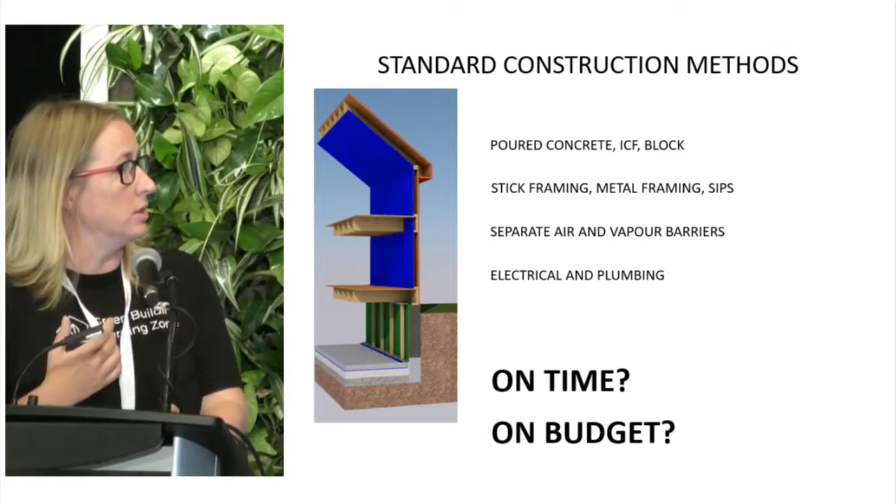The magic words of custom construction, we know it: on time and on budget. I've never actually been able to get those words out and feel like I can meet those criteria, because we have issues like our standard construction methodologies where we have so many different sub-trades coming together. We need air barriers at certain times, and then we have electricians that poke holes in the air barriers. This just shows one of our standard stick-built construction examples, trying to get the air barrier in the basement and the insulation in the right places, and the vapor barriers, and all these other things. We keep having to do these things, and we're coordinating the whole time to make sure that this is on time and on budget.

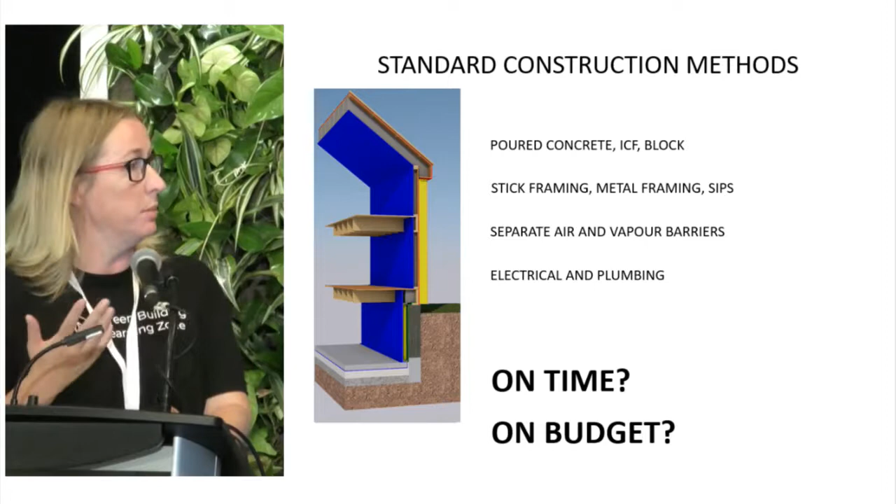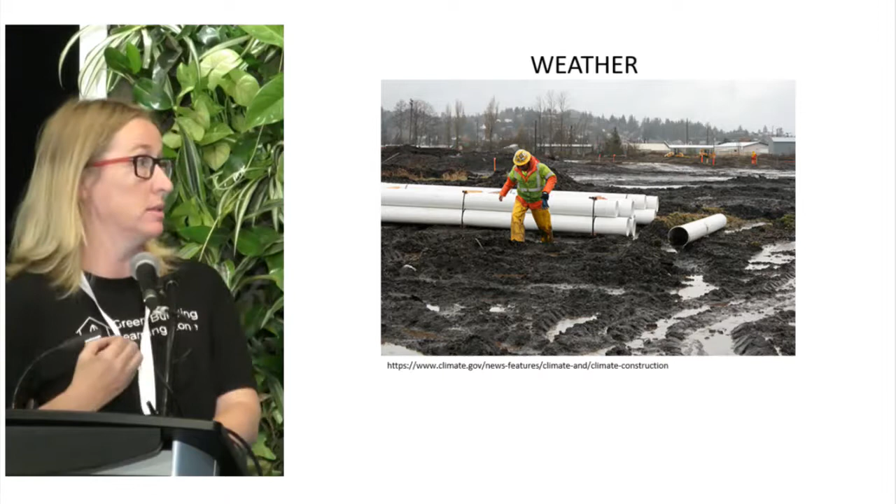But things get in our way. We have weather. And when we're on site working, these kind of conditions are not conducive to the types of detail-oriented work we must do for higher efficiency buildings. People are not at their best when it's raining or it's too hot or they're overcrowded getting things done. So that's not going to be on time or on budget.

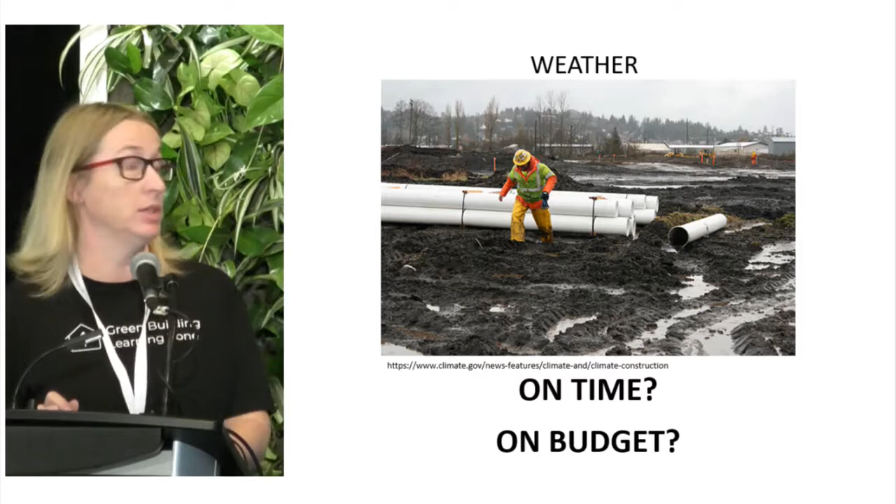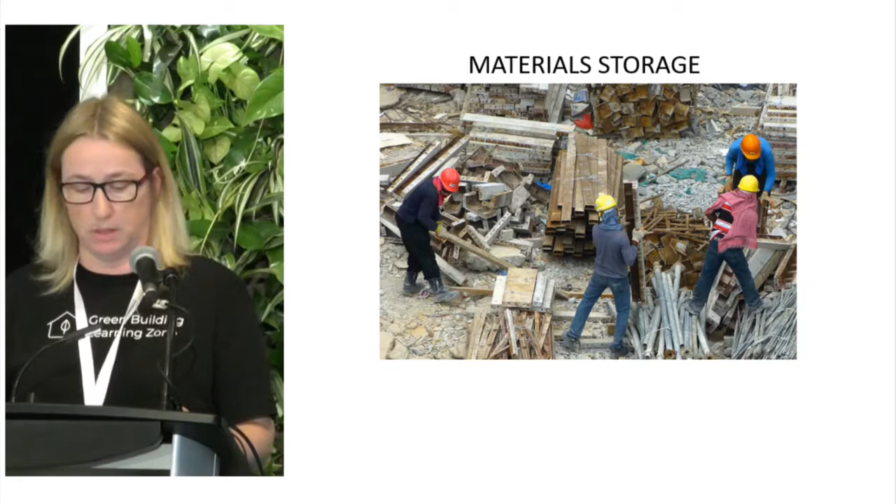Material storage on any site becomes quite a huge issue in some cases, because you're trying to manage this timeline that we're doing things in. When does the air barrier go in? When does the vapor barrier go in? Where are we putting the insulation? Sites are tight, and we're having a hard time dealing with it. So things aren't going to be on time or on budget.

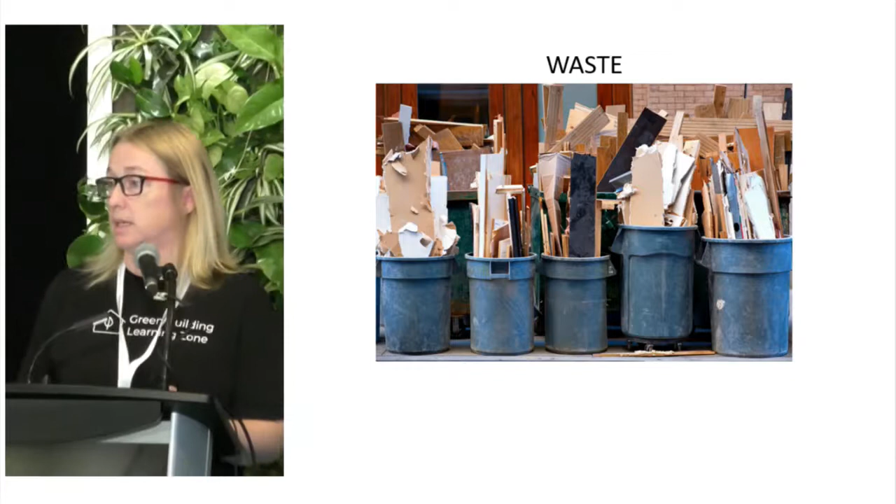Waste. Having that as part of the construction company's mandate is great. It takes a lot of time and energy dealing with recycling, and we have a lot of it. So we're not going to be on time or on budget if we can't deal with the waste stream on the sites.

In our more complex world, people want smart buildings with all this gadgetry, and everybody on a passive house site has to be on board with having an airtight, energy efficient building. I'm picking on the plumbers and electricians because they're putting holes in my building on a regular basis.

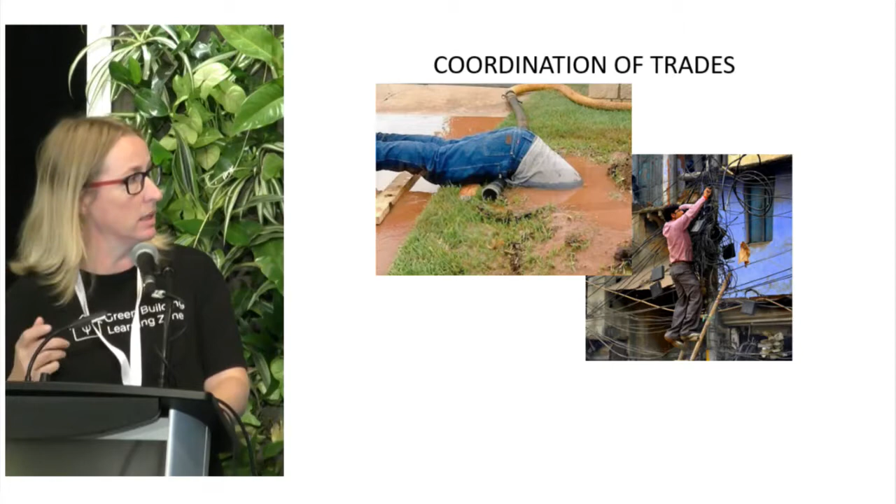One of the things we do on passive house sites is have somebody in charge—the air sealing person—to make sure this is constantly happening, making sure these holes are being plugged and filled in. But it's difficult to do in a site condition.

One thing we did was build a 1-story structure attached to a 2-story rammed earth structure, and there was a bit of a thermal bridge between the two. So we decided to use aerated concrete block and ram it right into the rammed earth wall. It would be hidden because we had a drop ceiling on this studio that was now 2 feet wider, and we'd put the mechanicals in there—you wouldn't see the aerated concrete block.

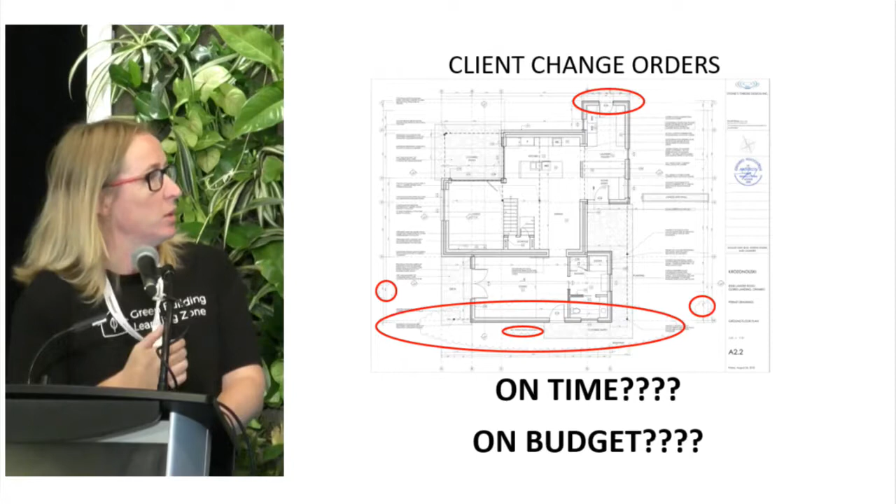And I thought I had it all covered. I always tell my clients it's like picking lice out of hair after finishing a set of working drawings—you have to go back and make sure you get everything. So we did, got the extra permit, and everything went well. Then the client said, oh, I like the cathedral ceiling. So now we have aerated concrete block as a feature on one of our walls.

So you can never know. These things are hard on all of us. When we're doing integrated design, we want to make sure we've got everything covered and we're all going in one direction forward.

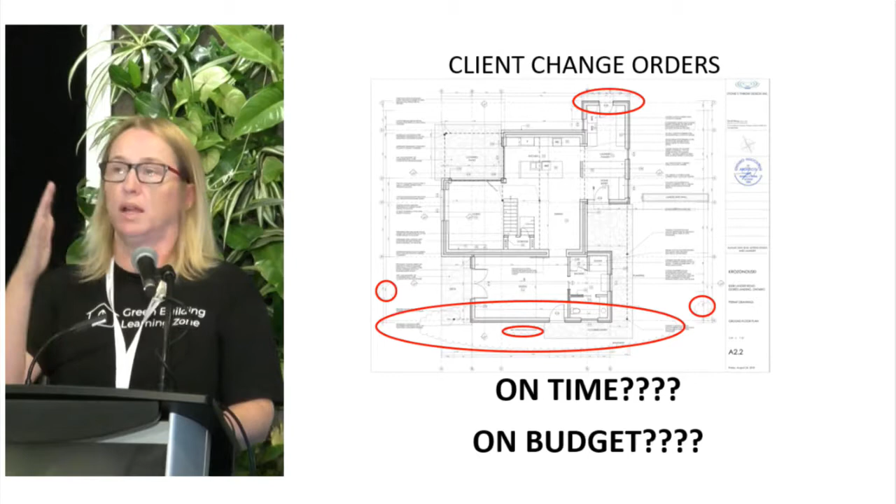So next level construction methods, I think, is kind of how we're going to have to go forward. Because if we're stepping over each other and leaving stuff on the site, what can we do to make this a little bit easier? Pre-designed structures is one way of thinking about it, and prefabricated panelized structure is another. You still have weather, but a lot less.

In a prefabricated or panelized building, we're working in small factories. I work mostly in small scale buildings, so a factory is just a roof, it's dry. We still have the same carpenters in the same spaces doing the same jobs, but they're never building in the conditions of a rainstorm.

You're not building when it's 30 degrees outside. With the weather the way it is, this is the place where we can take that out of the equation. Material storage becomes easier because now we're dealing with a building where we know what the inputs are and what the outputs are. Coordination of trades becomes a little easier too.

Mostly when building panelized—at least the ones I've dealt with—the electrical and mechanicals aren't part of it. I see potential for the future where we're looking at panelization that includes a click-and-play of that sort of thing.

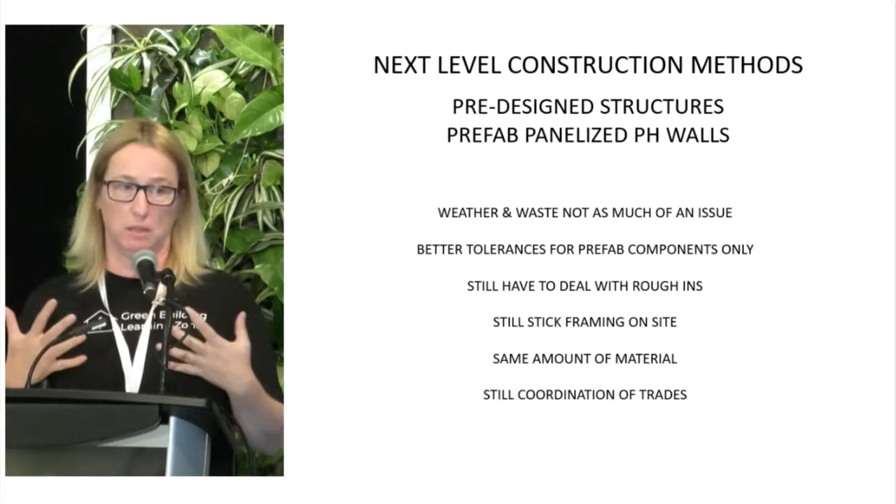You can optimize to a certain amount, and if you're a large enough company building in a panelized way, you have less waste, but you're looking at maybe a 10-15% reduction in costs for these types of buildings. With panelized structures, my suggestion is that the penalty for client change orders should be huge and reduced to a minimum, because once you've started building wall panels and roof panels, it costs a lot for clients to change their mind.

So perhaps it'll be easier on me in the future in that regard. I'm going to go through a few companies I've worked with or know of that have done some interesting things, and they're all a little different.

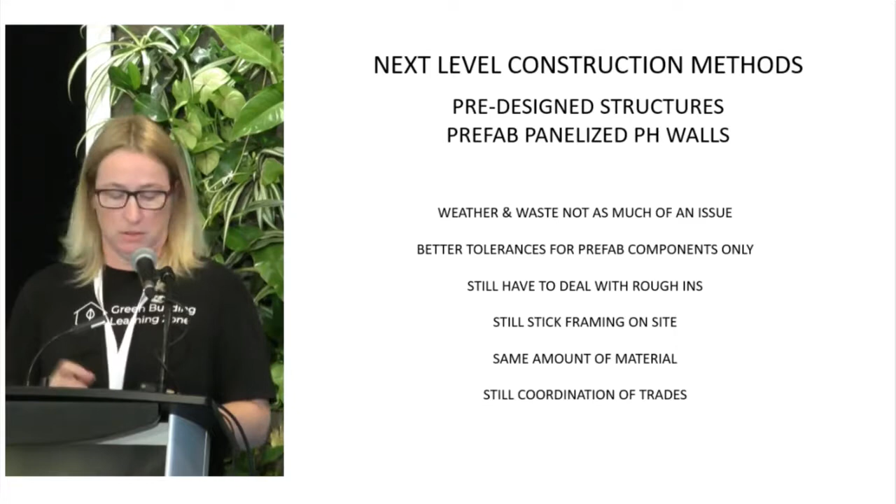This is Aiken Frame Homes, and they use attic trusses, helical piles, and a different construction season to reduce cost and provide affordable housing. They're an international company, but they started out in Muskoka.

What they do is build the top half of the house first, and then you live in it for a little while, and as your life circumstances change and you need more space, they pick the house up.

This is a project at a school, and it's actually going to be a dormitory underneath. But for the most part, these are single-family homes where they lift the house up, and they can build in the wintertime when the construction industry is usually less active in the areas where she's working, to benefit from those cost savings.

But there's another level we can go to with panelized projects, where they not only make the walls but can add the windows and some of the finishes. So I see that as a future for panelization.

But panelization is still a little bit custom if you think about it. This is showing some air barriers in the spring, and they'll keep adding to it. Every time you go to work as a carpenter, each wall is going to be different. There's no widget where you're making 30 of these today and 40 tomorrow. So although panelization is great for quality, if you're building something different every day, there are learning curves, there's time, and there's an expectation of getting up to speed on the next project.

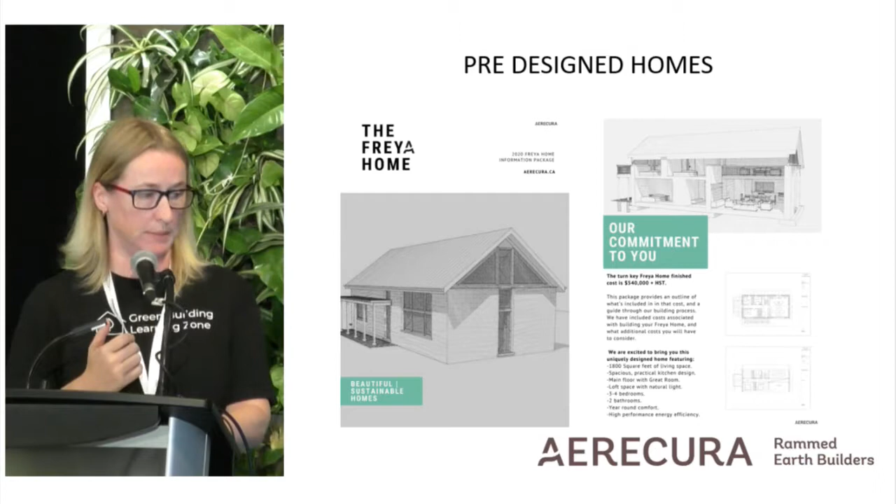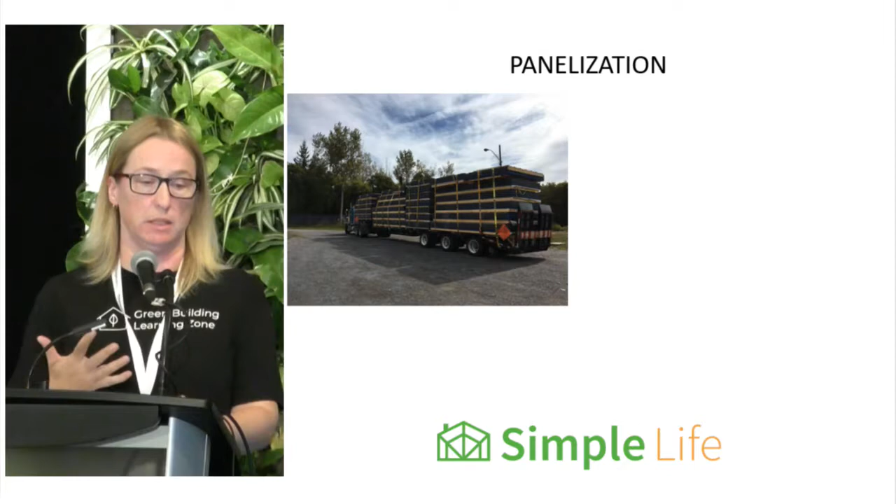They design them in 3D so they can see where it's going in the building and how it relates to the interior walls and windows and how it all fits. I always think of house construction on site as being within 6 inches or within 3 inches, but this is closer to industrial design, where you're thinking about millimeters instead of being out of square.

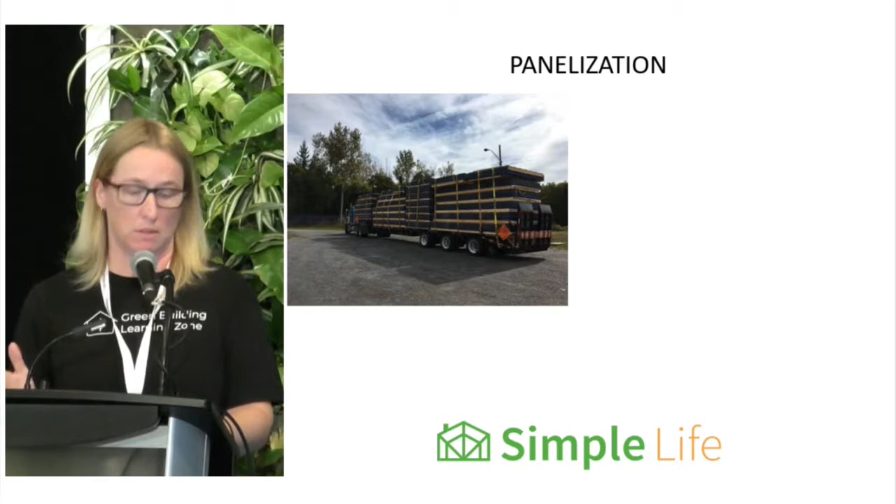And so they bring them to the site and they're part of the installation process. So it's a new way of thinking of what carpentry is and how carpenters work on site.

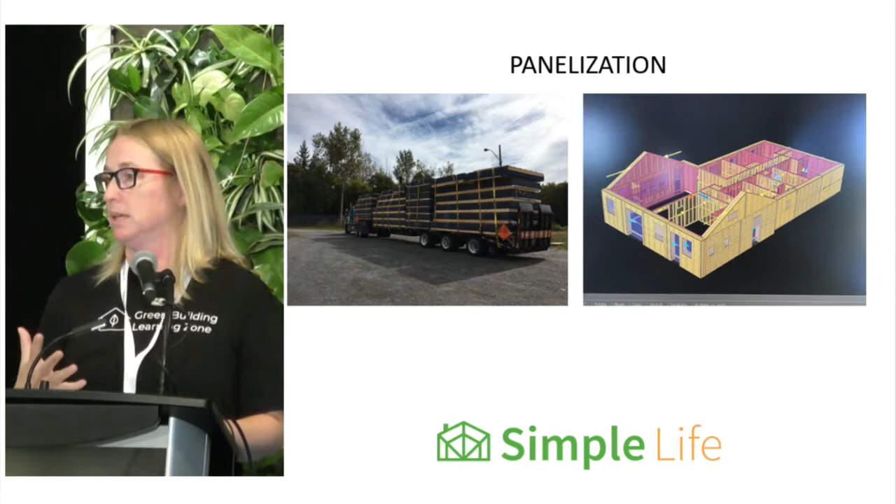So here's a factory of pinwheel structures. They're in St. Catharines. As I said, it's a place where you can start building buildings on - there's the factory for pinwheel structures.

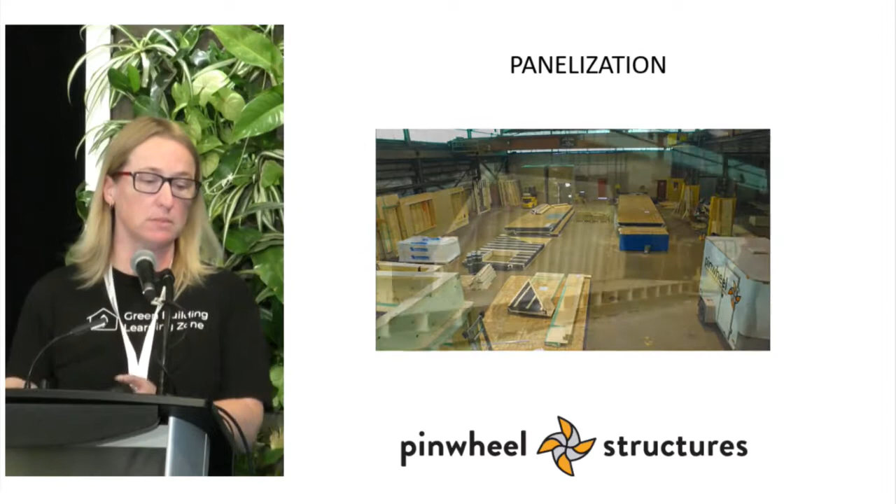And they do the same thing that the Simple Life home does. They're creating structures, adding a little bit more sometimes now with finishes on the outside of the building. So you can see the same wall going up, and they've got the equipment to lift these larger pieces and bring them to the site.

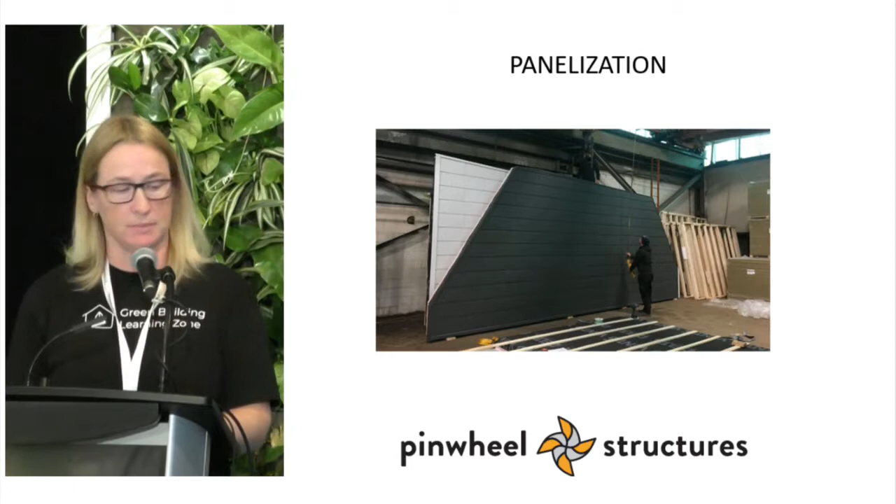So I think that this idea is a great idea, and I think you need to take it to each of these companies as they're starting out. They're very excited about what they're doing, and they're all going to be going to this next level.

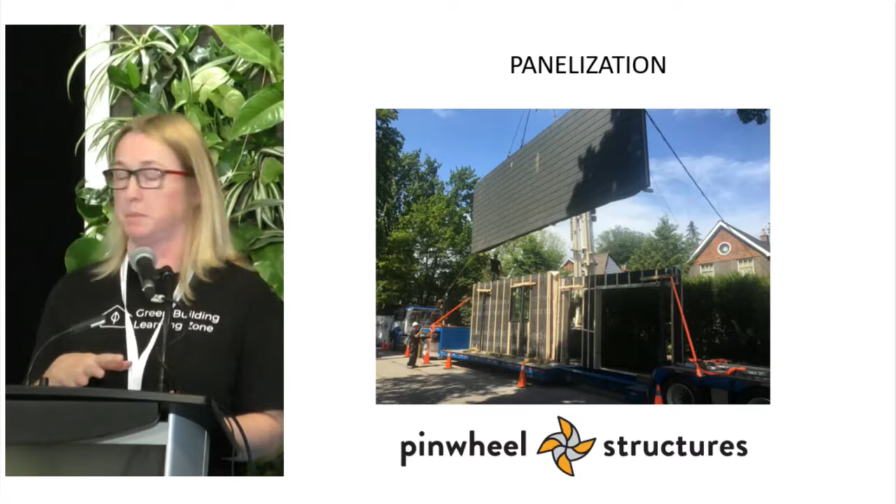So Build Smart, which Adam Cohen, who was going to do the speech, started many years ago, decided that we should have widgets - that panelization should be limited to a small lexicon of parts, an IKEA version of the envelope components.

So you can pick and choose from the foundation to the roof how you're going to build your Build Smart home. And it includes everything that you see there, including the passive house grade windows.

By limiting those numbers, picking through it, an architect or a homeowner can pull together different designs. So the homes are still custom, the buildings are still custom, and it doesn't matter if it's a one-story structure or a multi-unit residential building. The parts are all the same so that you can create these different structures.

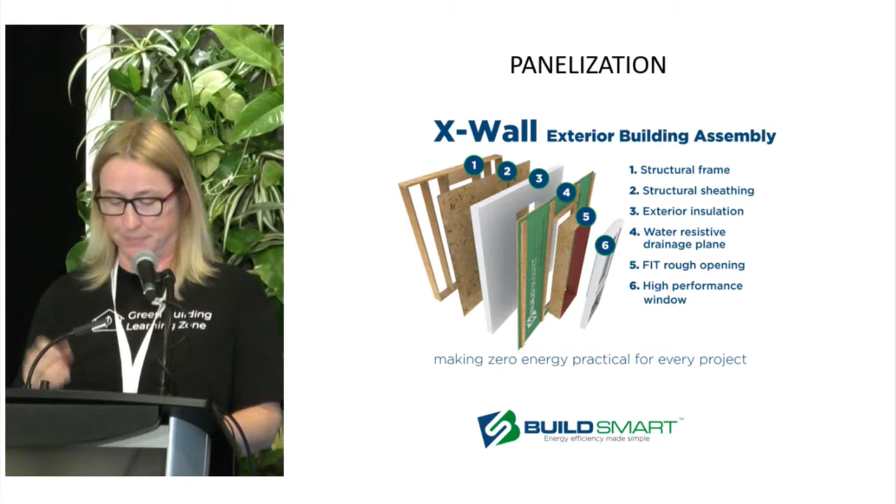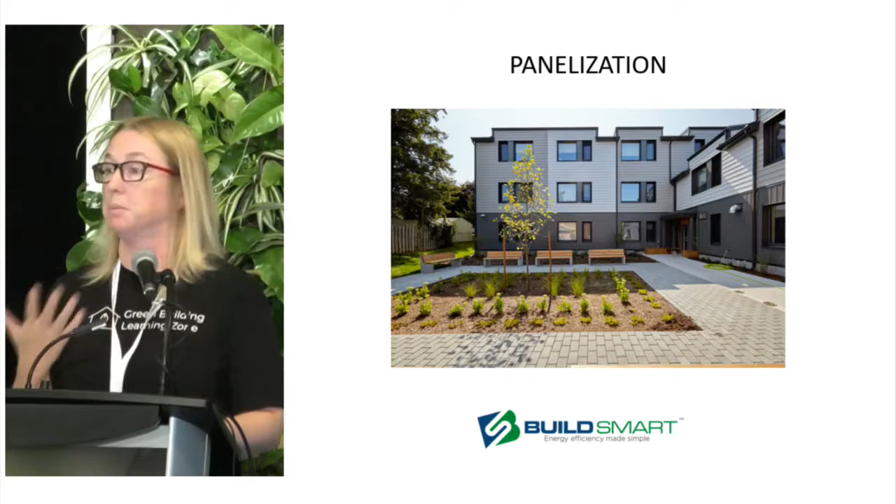So I think some of the nicer upgrades for the future would be when panels come completely finished. This is a picture showing how these prefabricated passive house panels can fit into a CLT building where they click in place and then the building gets finished quite easily.

So CLT construction is what I'm going to talk a little bit about next. The companies that are now working in the prefab passive house market right now - I'm going to just give you a very short list. There are tons more, but these are the ones that I'm aware of.

Some of the ones that I've already talked about: Build Smart, Quantum Passive House, Took Tree, Simple Life Homes, BC Passive House Collective Carpentry, Aiken Frame Homes, Agora Construction, Maison Element, Pinwheel Structures, and Element 5.

Passive Buildings Canada, the other organization that I run, has lots of articles on really interesting topics in passive house, and there just happens to be one that we put up based on the prefab panelized market that's in Canada right now. So I think that's a really good thing to check out for more information, and this list of companies working in it at this point.

So now we want to think about something that's beyond panelization. What if we design buildings more like industrial products, but in the best way?

With low carbon materials and time-tested prototyping - test, manufacture, and learn from it, taking lean principles, repeating until the product gets better each time - we're going to have tighter tolerances, no discrepancies between what the architect has drawn and what actually gets built. If there's a building out there that I've designed that even matches my drawings, I'm quite happy.

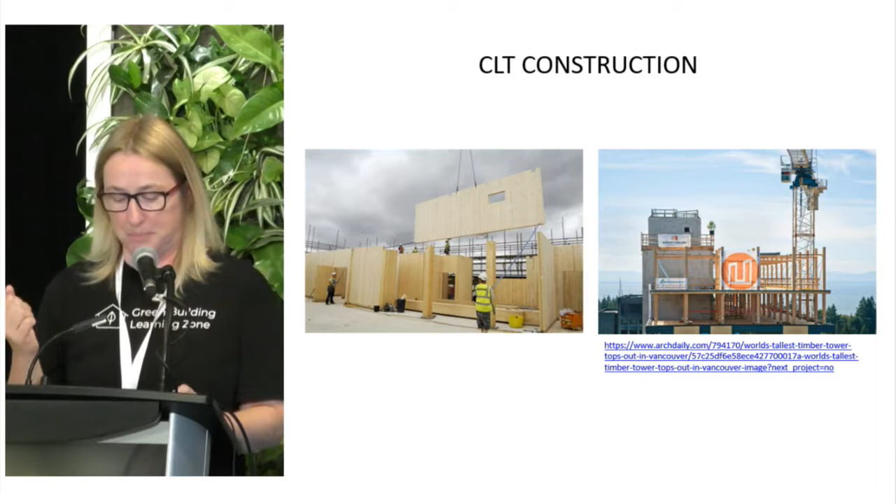Right now they have a playground here at the Carpenters Union, and I got invited to go and play in the playground with all the carpenters. And I was quite surprised - I've been very lucky in the last few years to get to know a lot of German manufacturers of CLT products.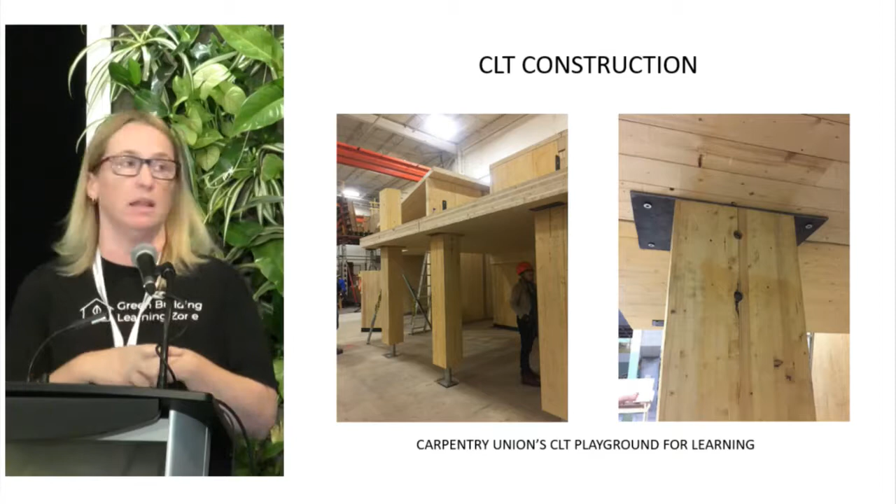And I had these expectations that the CLTs would be finished, that the details would be hidden, and all the fasteners would be hidden. And I got to go to this thing, and I really did enjoy it - it's always fun to watch people building. But they were using skill saws to cut the CLT, and I'm like, why would they do that? I think it was partially because of the timing on this one.

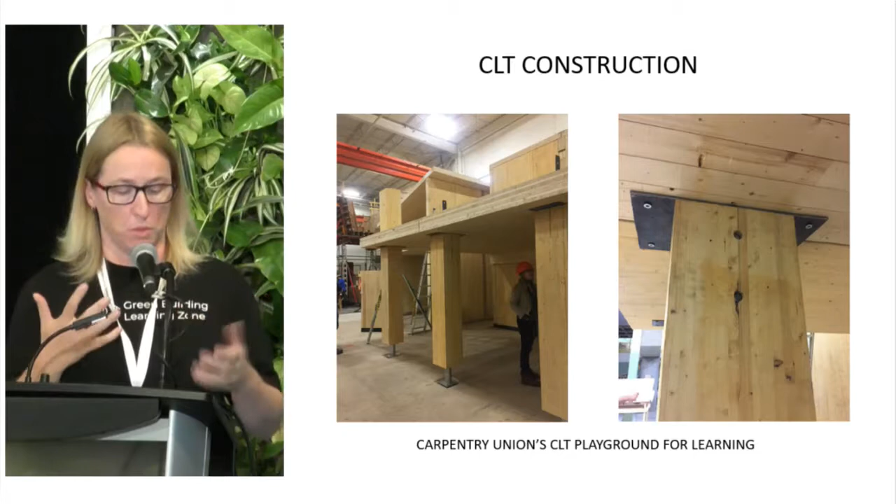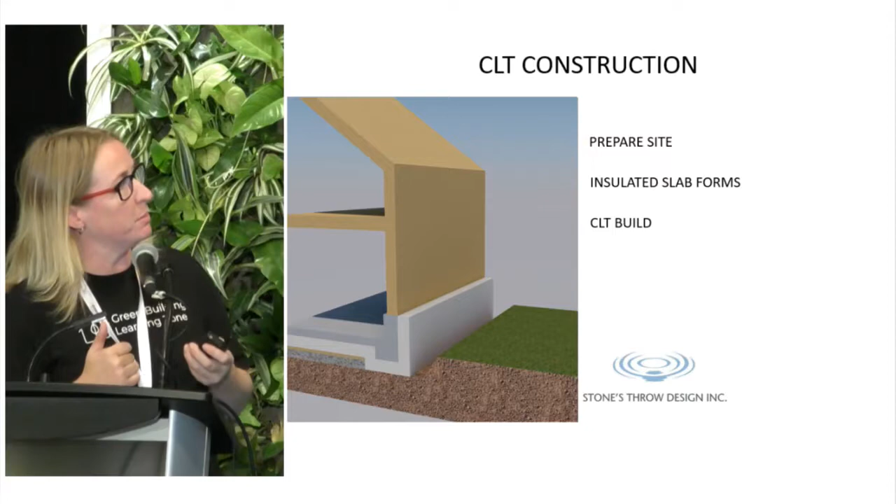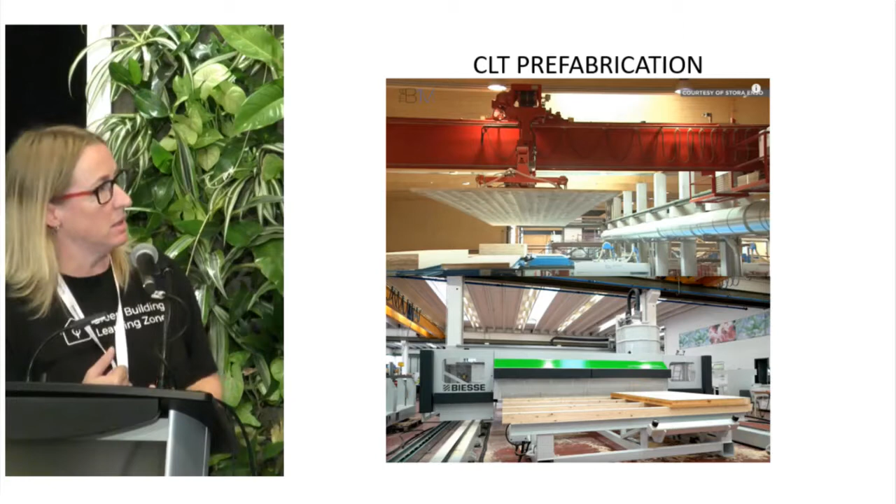But CLTs can be put through a process, more CLT construction can be put through. This is the simplification of how CLT structures go, compared to the earlier design showing all the finishes, making it more simple. This is how we should be building with CLTs, where the factory is no longer just a cover for the carpenters, but you're using CNC machines that do everything.

They're routing out the jamb around the doors so that all you have to do when you plop the interior walls into the building is stick the door in. It already has the reveal. You've coordinated with the mechanical engineers for where all the openings are going to be. The electrical outlets have all been pre-designed so you can route the electrical through the building, and it's all done through that integrated design process.

Where you spent that time up front - I had the opportunity to work in Pickle Lake near White River, Ontario, where we designed 5 houses, and I was in charge of doing the shop drawings for the CLTs. Most nervous time in my life, knowing I can do a design and hope the electricians get it right. I had to draw every single panel that had to be built in that house, showing all of the holes, all of the doors, so they could put that information into a computer in a totally different country, because it wasn't available to us here, so that I wouldn't be so nervous when those panels came over on a ship to be put into place. Very kind of scary, but it works.

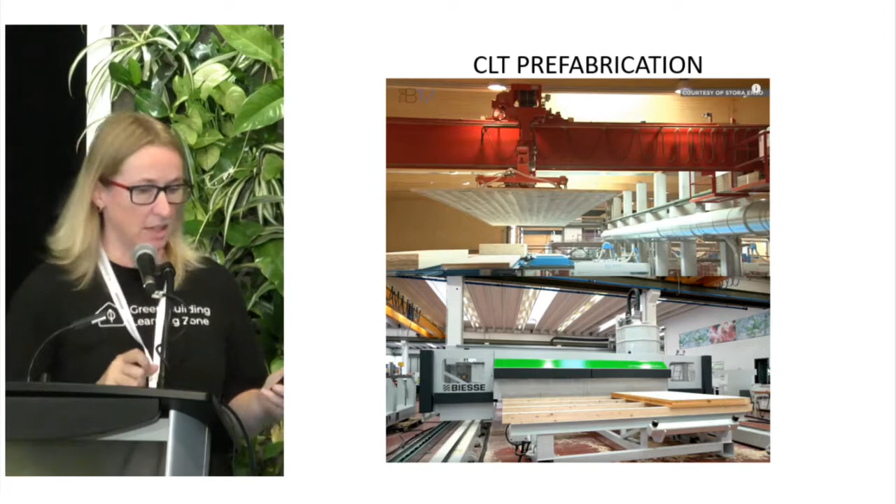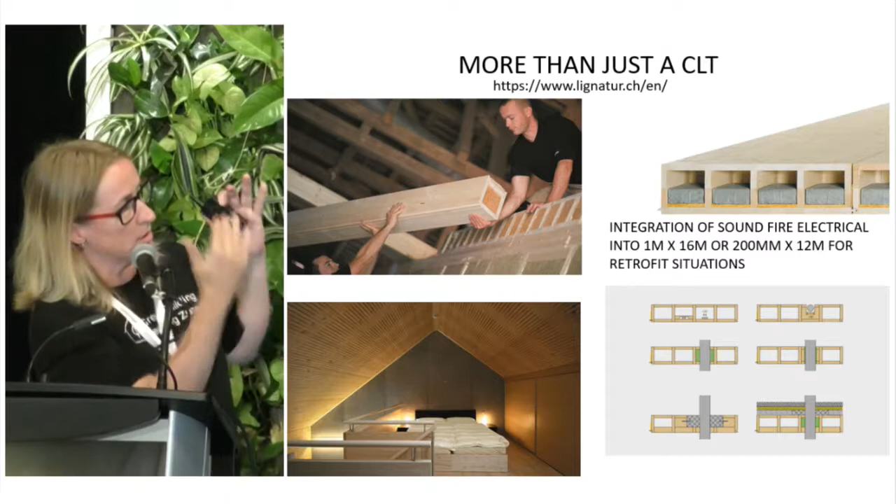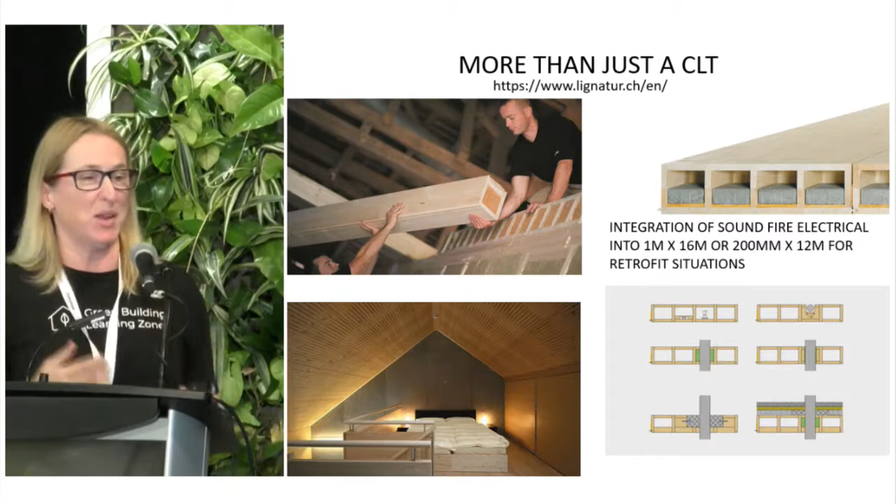And they come with more than just insulation in them - they can come with the fire retardant, but you see the one where the bedroom is with the sloped ceiling, so it's not just floors, it's ceilings as well, where they add in acoustical patterns depending on what type of space you need. So if you're in a yoga studio it might have a different pattern than if you're in a theater or something like that. These things are being done based on this new digital age we're coming into in construction. These aren't available here unless you know somebody, but it's the future. I think it's really great.

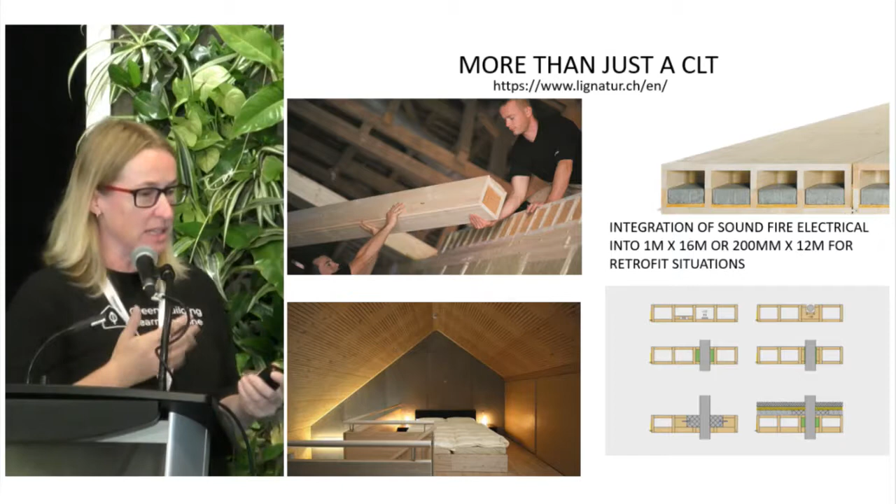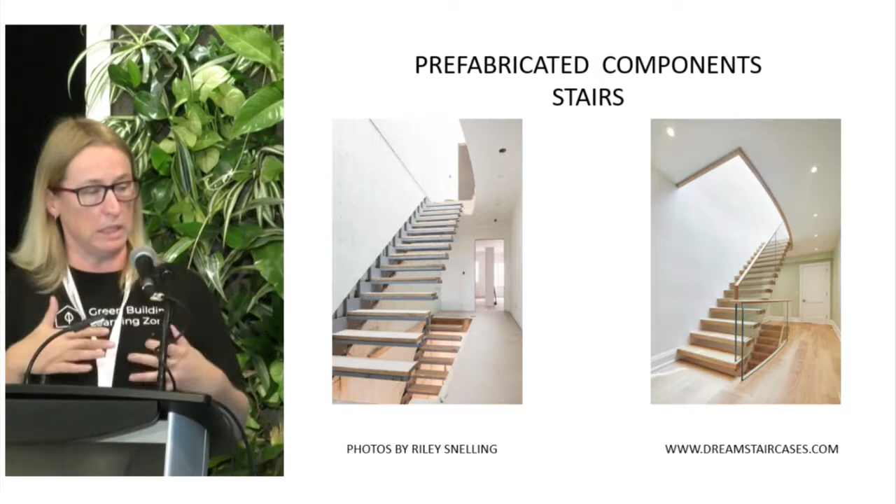One of the things I've also been able to do is start to look at prefabricated components. These stairs were actually designed in Toronto, and we'd have integrated design meetings with 3 different companies to make these stairs, all located in different places on the planet. The metal company had to understand what the wood company was doing to make the steps, and the glass company had to come together so that the wood would fit into the glass on a curve. So it's possible, although scary, that we could measure the site with a laser and then come back 6 months later and build this staircase in a few days, because it was pre-finished and pre-done.

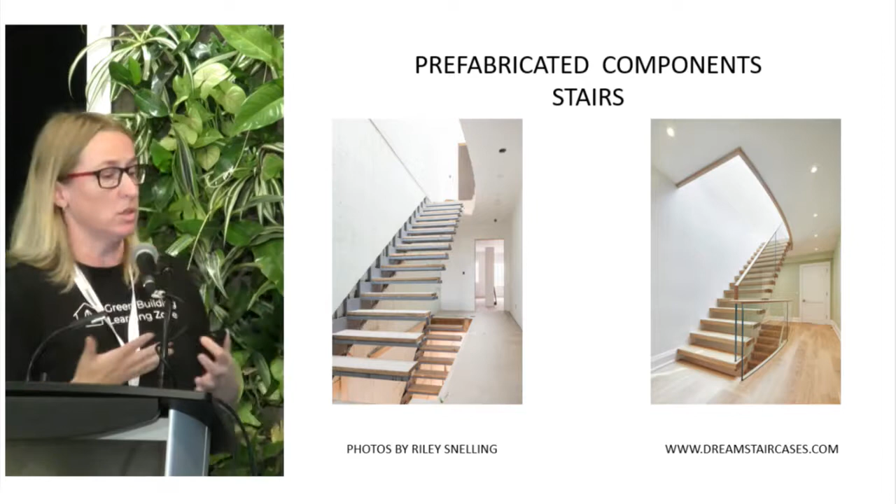So here is the next level: SurePods. These are bathrooms that are fully designed with the plumbing fixtures - they practically have the toilet paper in them. They are shrink-wrapped and sent to a site to become the bathrooms in a high-rise building, so they're already done. Everything's the same, we don't all have to have a special bathroom - we're okay, the toilets work the same way. I think it's really interesting that we can do that with bathrooms.

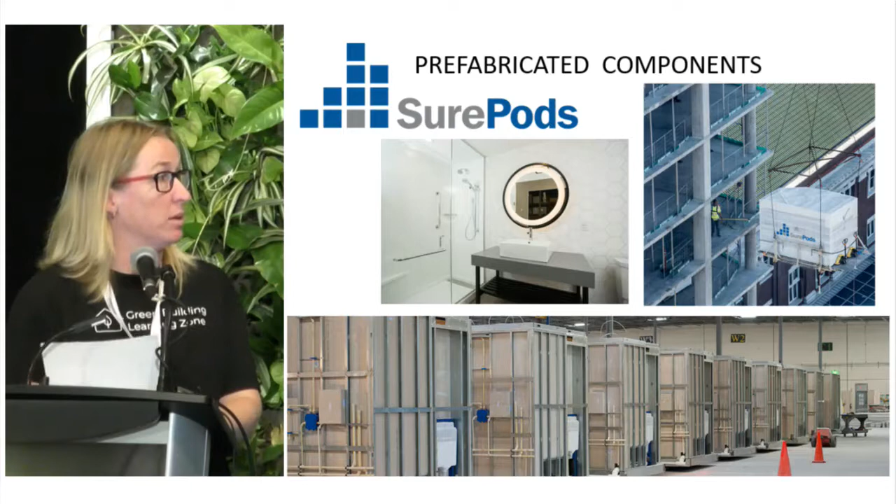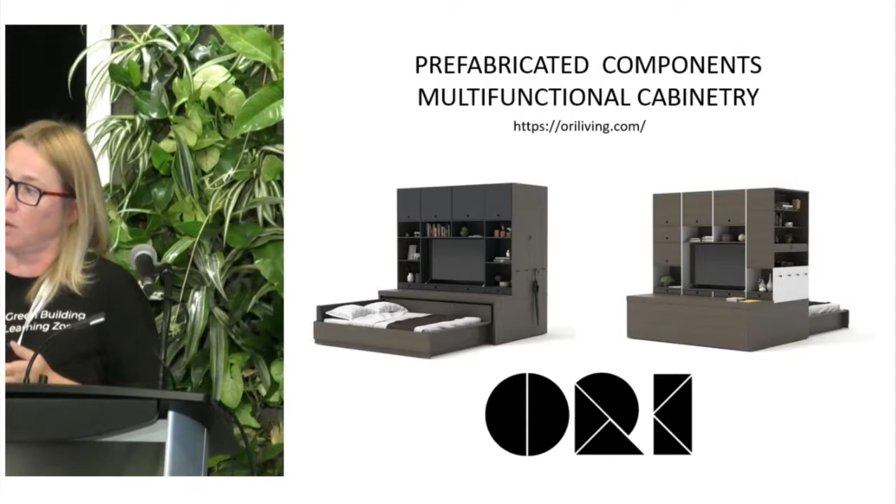This is an interesting company that takes the prefabricated idea and mechanizes it. These cabinets would be for a small studio apartment that you could turn into a 1-bedroom. You push a button and the bed pops out on one side, push another button and the whole thing moves in a different direction. It becomes a walk-in closet, then it moves again and becomes an office or a living room. All these parts move, and they're working with, I believe, IKEA to sell these for multi-unit residential projects.

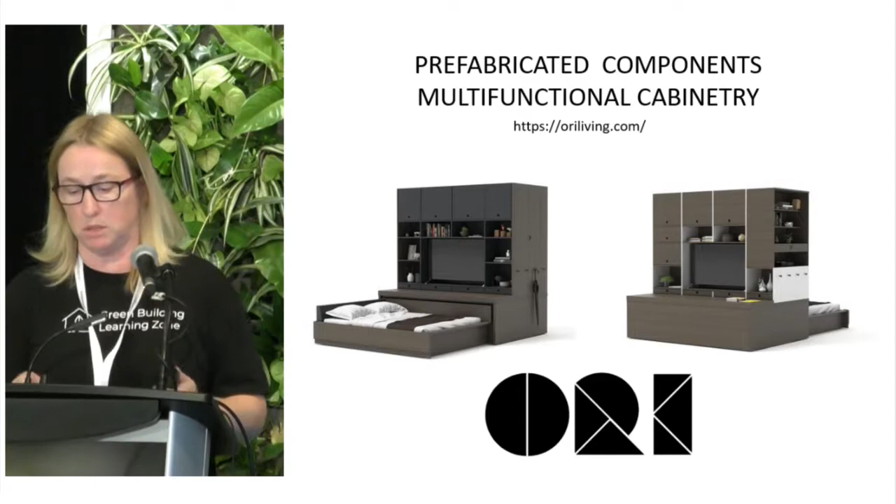I thought, well, what else is missing in our buildings that aren't prefabricated? I didn't think I'd find one, but I was thinking with high-rise buildings we'd be needing prefabricated stairs and prefabricated elevators. Never did find the stairs, but there are companies out there that do prefabricated core construction in metal and in concrete.

The picture with the Phoenix on the right-hand side, that's a school where they didn't want to stop school during the year, but they needed an accessible elevator for the building. So even while school was going on, they just had to prepare the hole, and they plopped the elevator in—it was a retrofit situation. Very interesting.

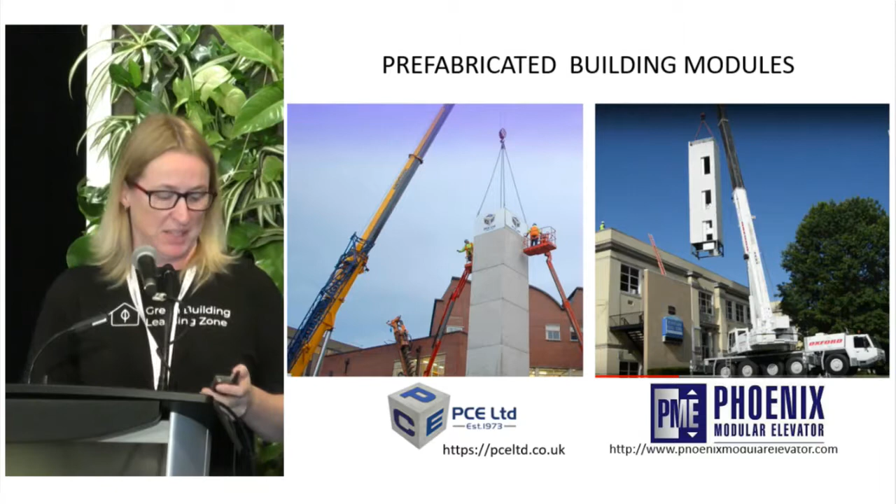I think this is sort of in the future, I don't know if it's actually happened yet, and I'm not a mechanical expert, but I see that the mechanicals are the things that matter—you can have an apartment all you want, but if you can't get the water into and out of it, if you can't get the waste out of it, we can build prefabrication all we want, but we need that next level of prefabrication where the plumbing, mechanical, and electrical stacks can be tilted into place, and we design around them instead of trying to shoehorn in all of this complicated, crazy stuff, putting our designs at an equal level to the mechanics of the building so that they function really well.

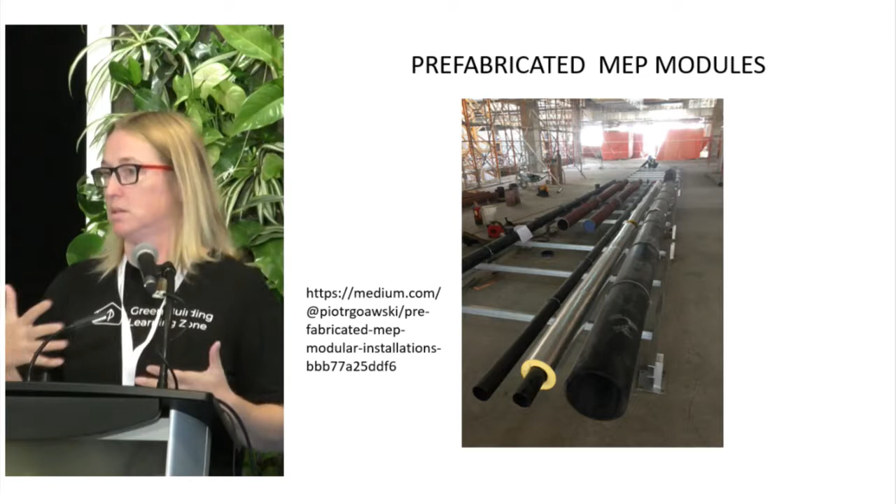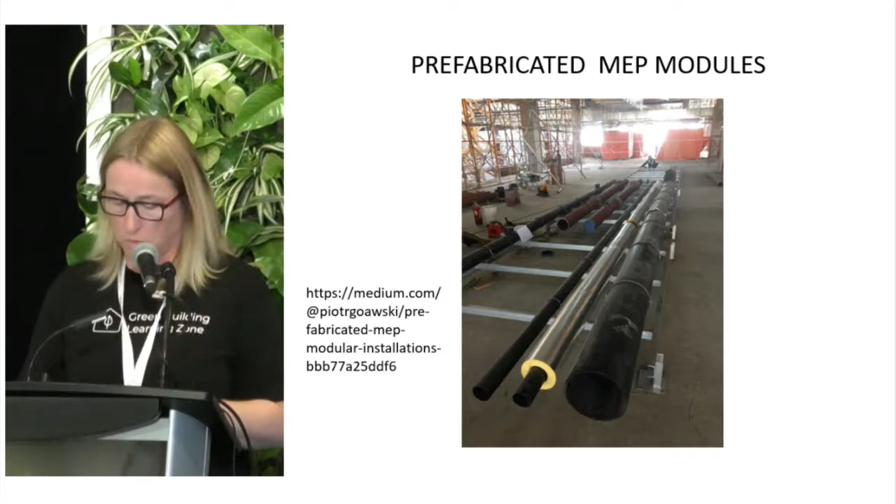These are designed so that in the hallways of the apartment buildings, the person servicing it has access in a way that they're not disturbing the people in their units. So these are things that I find really interesting in terms of the future.

On a high-rise building, one of the big costs is all the safety equipment you have to have for all those people hanging out. This is designed so that once these are in place, you're already an occupied building—so you don't have that. This is where the savings come in as we look to the future.

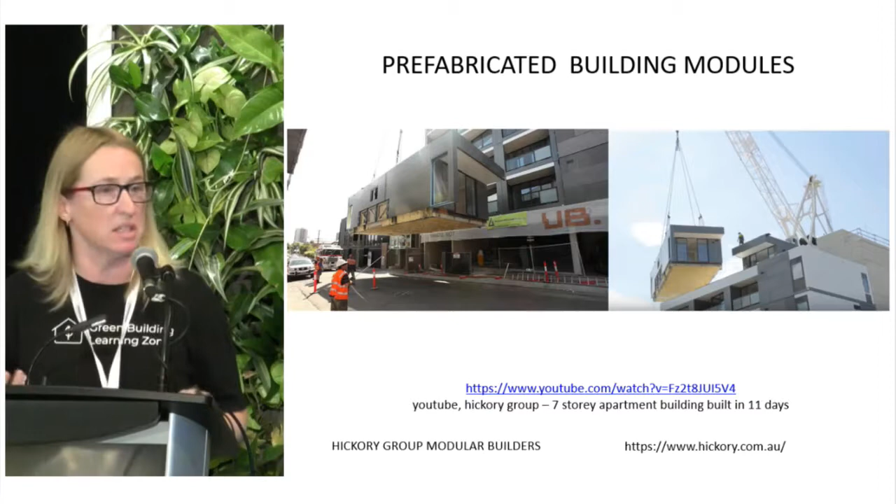This is another company out of Australia, Hickory Group—same idea. They're building multi-unit residential; the missing middle could be built in 11 days. Think about it. They're lifting the units one at a time, and the buildings aren't boring. They can be insulated to any level you want, so using these methodologies it would be really easy to reach energy efficient levels with quality, consistency, and compartmentalization.

That's another thing I'm thinking about—these things really help with the compartmentalization of air barriers and vapor barriers, that idea that you're not smelling something down the hallway, or undercutting doorways to make that happen. This is sort of taking it to the next level. I think I got ahead of myself here.

The last thing is the future of the construction industry is changing. The nature and definition of what a construction worker is will have to include working in high-tech factories where quality controls ensure far superior products. To meet the higher quality demands of energy-efficient designs within tighter budgets and time constraints, we will have to adopt greater integrated project design, embrace multi-platform technologies to create structures that are on time and actually on budget. But, big but, only through the reduction of our energy use, the waste, and the embodied carbon of the materials we put into our buildings can our industry be part of the climate solution. Thank you.